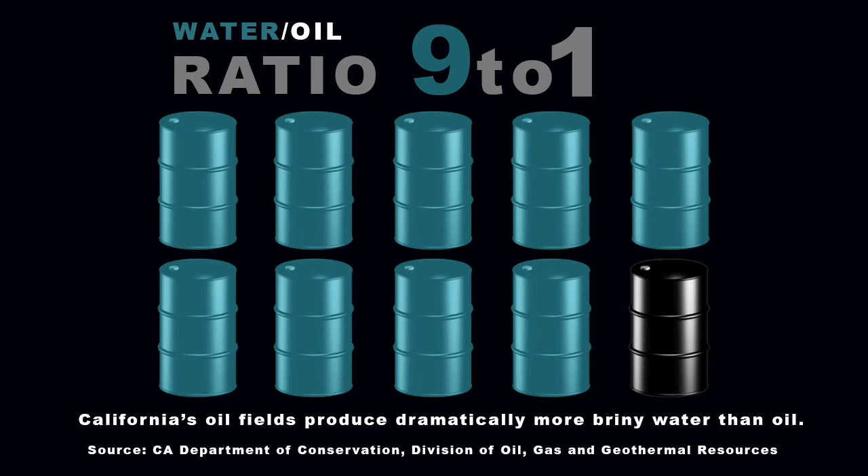Thus, cementing should represent the security system that reduces the economic and environmental risk during construction and operation of wells. The high water-oil ratio is a feature of most oil fields under production. The cementing quality is one of the major factors that influence this ratio. To improve the fluid tightness of the well, we need to change the approach to the technological decision-making system for cementing.

Application of the technological decision-making system for solving complex problems in Hovsan number 1861 well cementing. Consider the algorithm of the technological decision-making system using the example of the Hovsan oil field number 1861. The oil field was put into operation in 1948, and it has been developed for over 60 years by Azerbaijan oilmen.

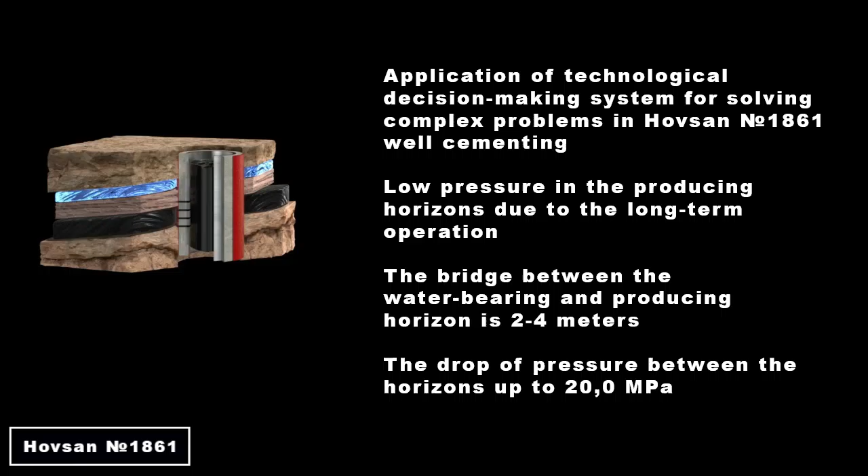The reservoir pressure in the producing horizons decreased almost twice due to long-term operation, while in the water-bearing horizon it remains original. This creates a pressure drop between the horizons of up to 20.0 MPa. Even greater load occurs during operation by reducing bottom hole pressure. Attempts to solve this problem using the traditional approach to cementing did not give any results because crossflows formed, water flooding the well.

How does the technological decision-making system of SKS-GK work? At the first stage, experts of SKS-GK estimate the initial object conditions and develop the requirements for a technological cementation complex able to minimize the effect of factors reducing the tightness of the system: casing column, cement stone, wellbore wall.

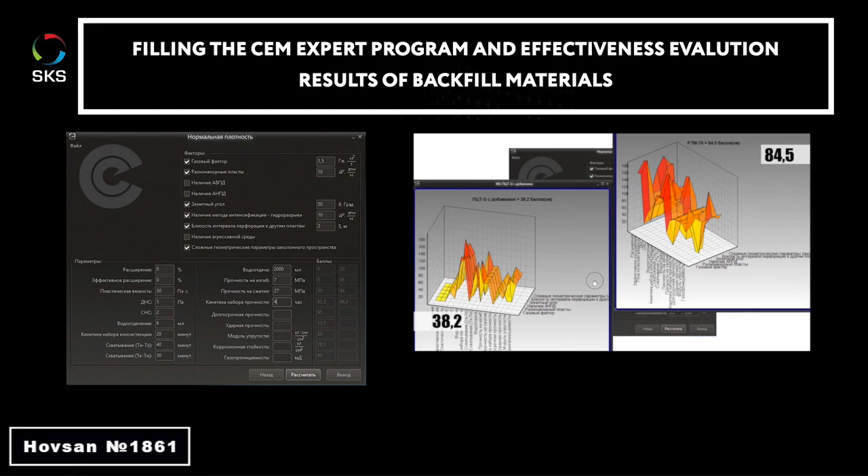The next step is development of elements of the technological complex and their evaluation by the CEM Expert program in the network of SKS-GK laboratories. A 0 to 100 point evaluation in CEM Expert shows the effectiveness of the cementing complex in countering factors that increase the risk of leakage in the well. For expanding backfill material RTM 75, the score is 84.5 points. For lightened backfill material OTM 4, 38.2 points. For the developed cementing technology, 80 points.

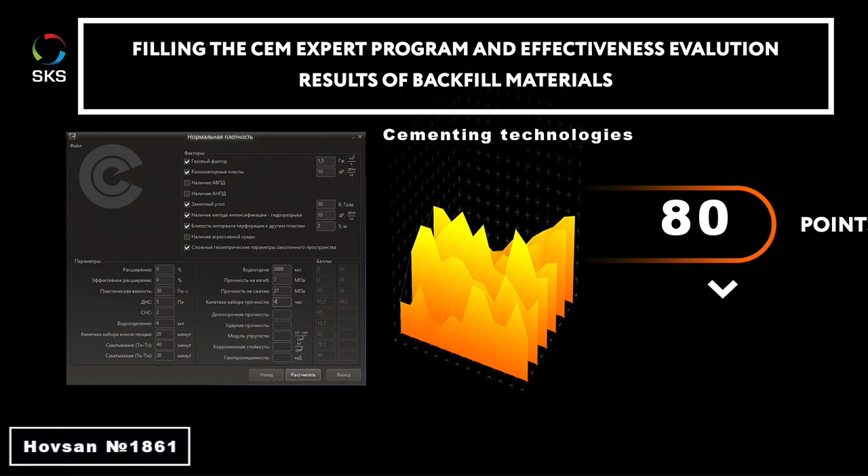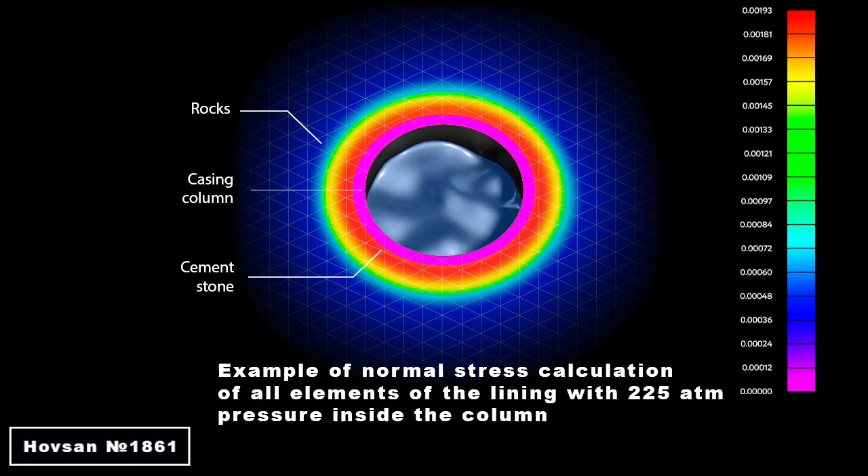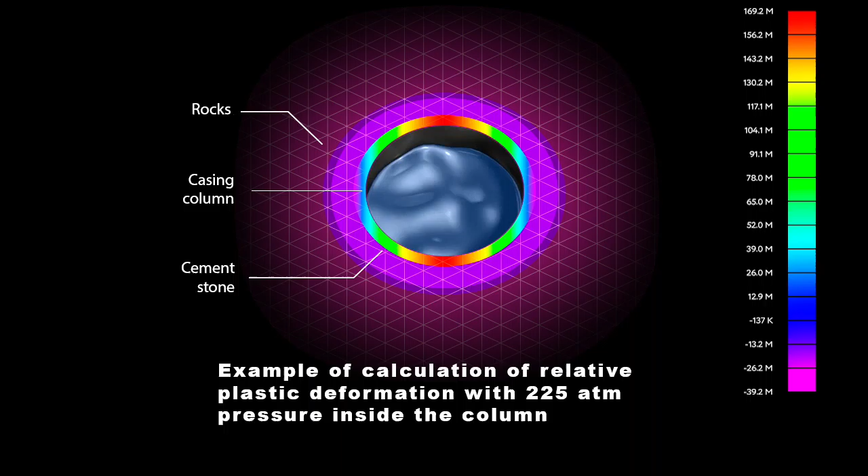Next, the algorithm assesses the risk of leakage in the well during development, operation, and application of production stimulation methods, such as hydraulic fracturing, with computer modeling of the load distribution in the system: casing column, cement stone, geological materials. Values of calculated stress and strain in the cement stone are compared with laboratory testing data. The technological complex is allowed for use when results are positive.

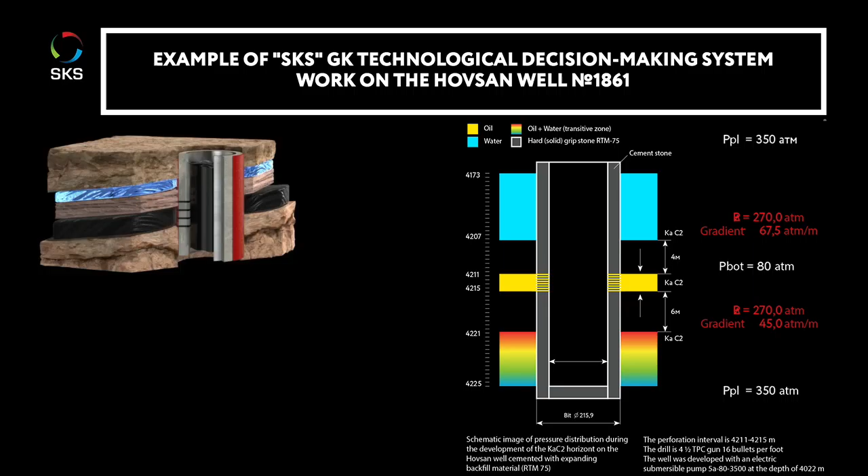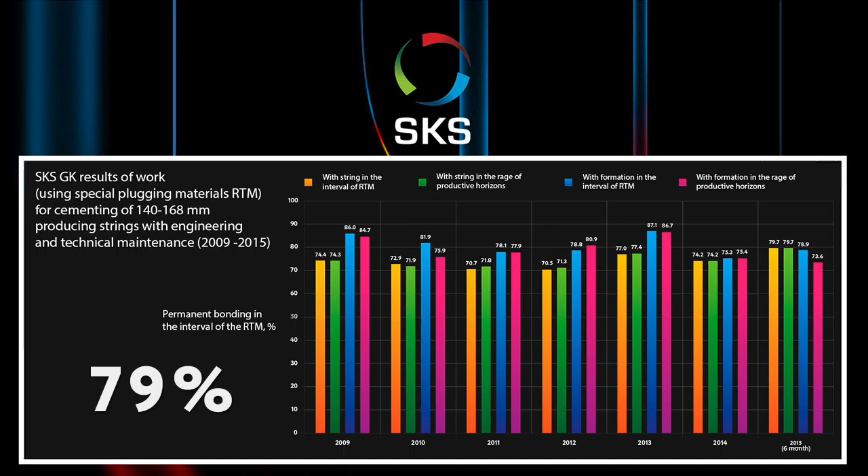As a result of applying the SKS approach to developing a technological complex, we managed to create a lining which can withstand a differential pressure of 6.7 MPa per meter. Permanent bonding in the range of productive horizons, as a cement bond logging result, was 100%. Commercial oil flow was received. Over 12,000 wells were cemented with this method. The average cement bond logging trend of permanent bonding in the RTM interval is 79%.

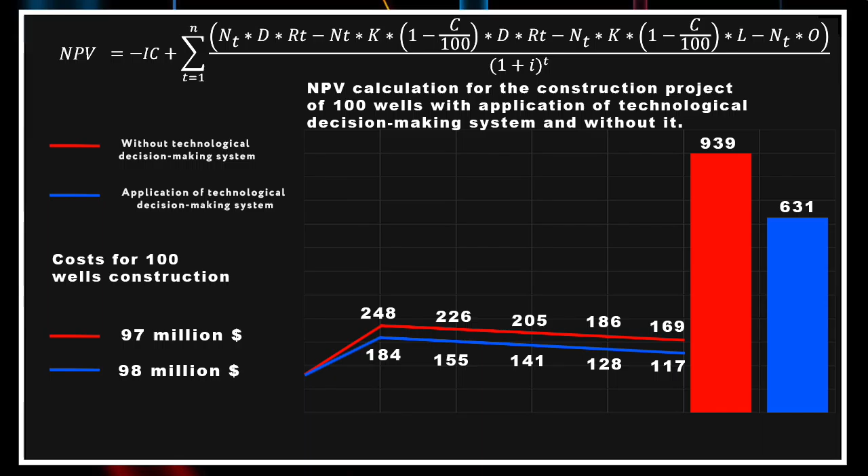The estimation of financial risks of well construction is one of the practical products of proactive assessment of technological systems efficiency with ChemExpert software. The diagram shows NPV calculation results for a construction project of 100 wells with an average production rate of 50 tons per day. Complexity factor is 0.58. The ChemExpert assessment with the technological decision-making system is 92 points, without it 65 points. The number of failed wells with the system is 4.5%, without it 25%.

A comparison of the total investment of the object construction, including the cost of developing a cementing complex and the amount of probable losses upon the occurrence of various types of risk, technological, technical, and financial, allows us to see the real price. In other words, the financial effectiveness and risk rate of taking technological solutions.

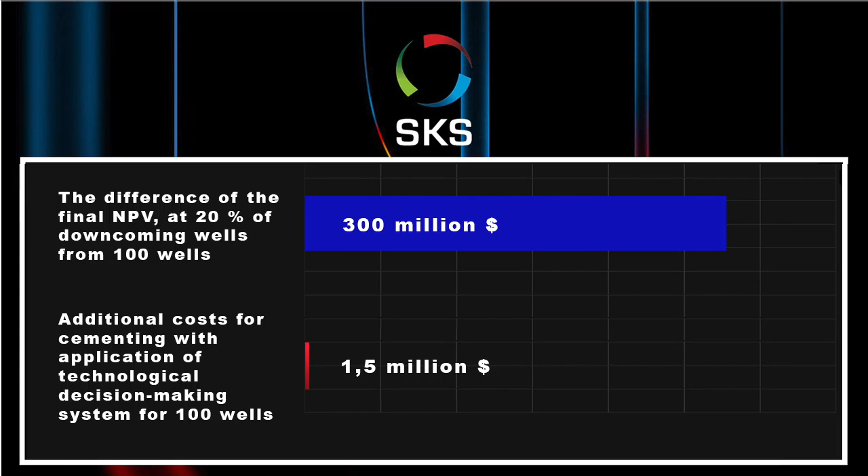What we offer. Expertise set: supply and/or development of software products for customer needs, as well as laboratory tests and analyses with and without such software. Technological pack: use of SKS Group's productive and technological capacities for work at the customer's facilities. Its product is application of the developed technological complexes for cementing on the customer's facilities.

Consulting set: recommendations using the first two sets' tools, aimed at achieving the greatest possible increase of cementation efficiency and thus a significant increase of the client's production rate, using methods of revealing and minimizing the factors hindering the client's business objectives.

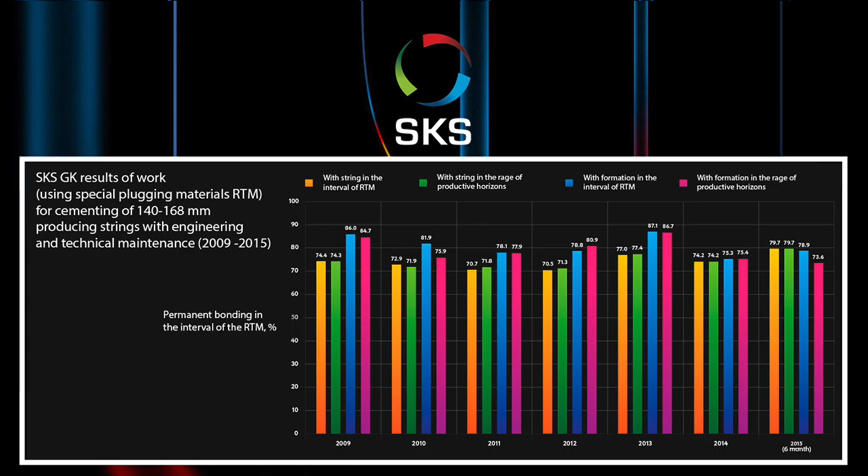Risk management set: a compound of the previous sets, targeted on identifying and minimizing risk factors in cementing oil and gas wells. Its product is a proactive risk assessment of the client's company in the area of well cementing.

In a down economy and with falling oil prices, it is necessary to move from economy to economics, from quantity to quality, to extend the operation terms of wells, to create maximum fluid-tight lining, and to assess the financial risks and financial prospects of cementing complexes.